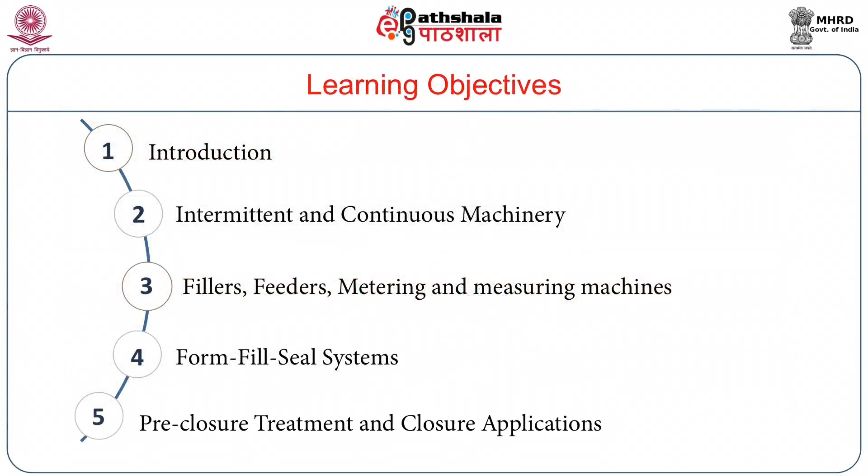Hello friends, in this module we will learn about various machineries used for packaging of food products, which includes palletizers, shrink wrapping, stretch wrapping, form fill seal machines, etc. So we will start with the introduction.

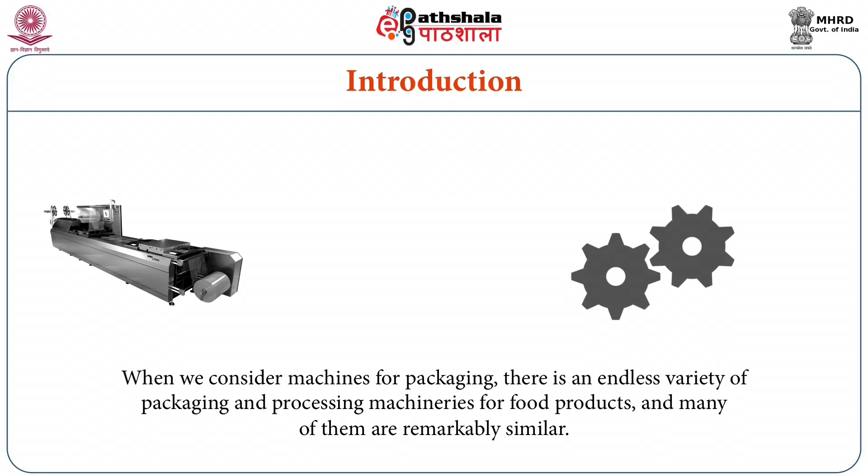Packaging is the science, art and technology of enclosing or protecting products for distribution, storage, sale and use. When we consider machines for packaging, there is an endless variety of packaging and processing machineries for food products, and many of them are remarkably similar.

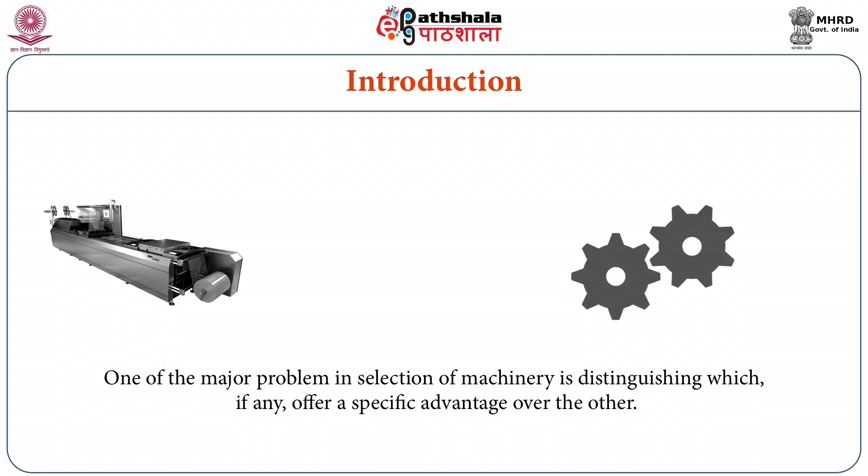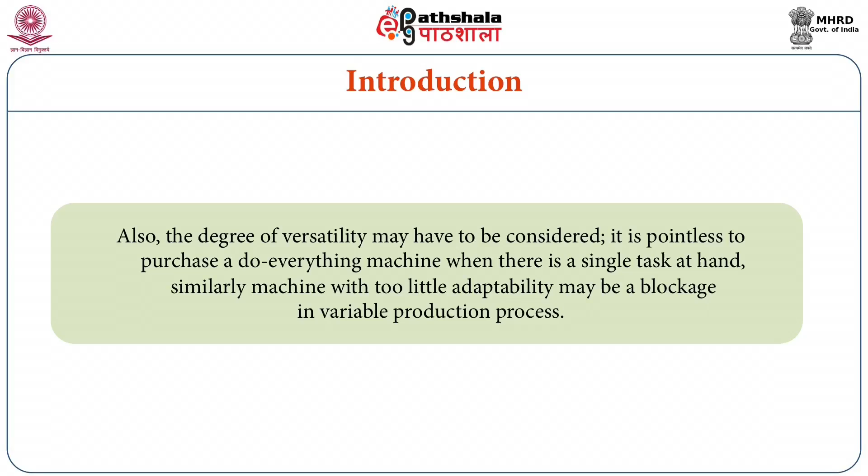One of the major problems in selection of machinery is distinguishing which, if any, offer a specific advantage over other. Also, the degree of versatility may have to be considered. It is pointless to purchase a do-everything machine when there is a single task at hand. Similarly, a machine with too little adaptability may be a blockage in variable production process.

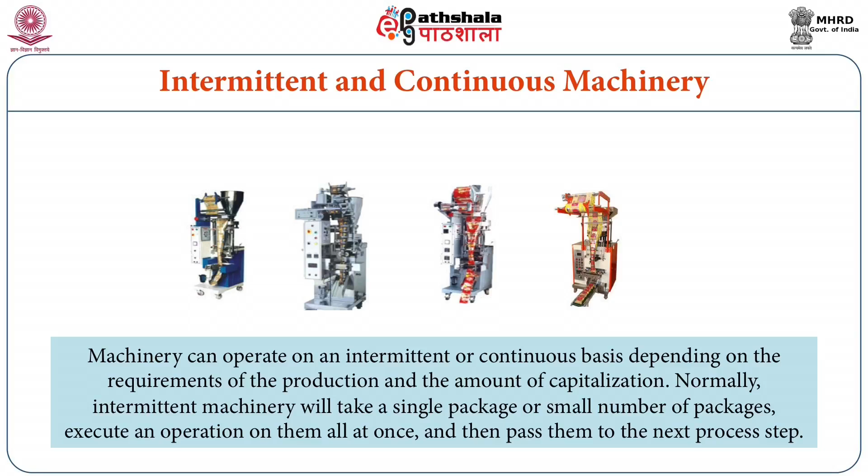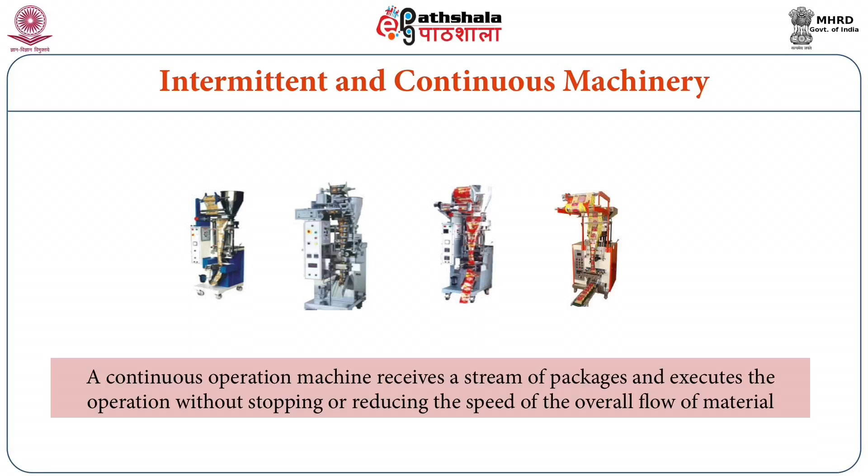Machinery can operate on an intermittent or continuous basis depending on the requirements of the production and the amount of capitalization. Normally, intermittent machinery will take a single package or small number of packages, execute an operation on them all at once and then pass them to the next process step. A continuous operation machine receives a stream of packages and executes the operation without stopping or reducing the speed of overall flow of the material.

However, a 4-station manual feed filling machine might be suitable for a small winery. That machine would be useless for a soft drink bottler who needs several thousand fillings per minute to remain competitive.

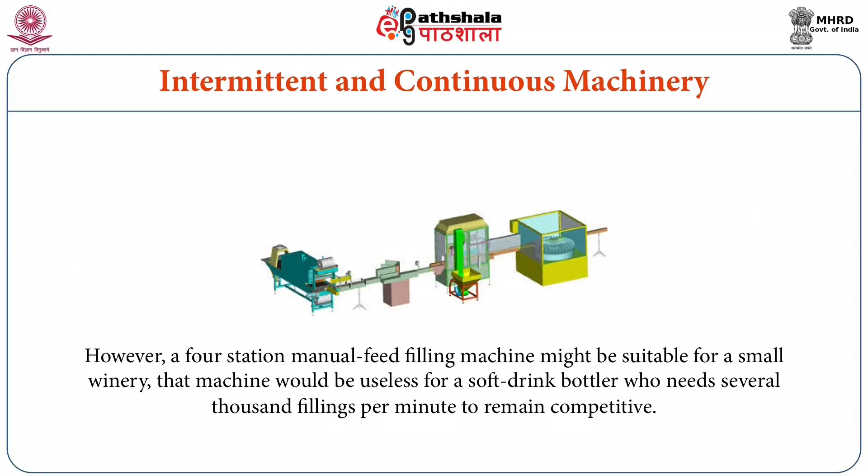Equally, while continuous machinery is more economical at high throughput rates, it might make less sense to have a high capacity operation that is in operation only for several hours a week because of low demand. Although for the smallest of markets this may happen because of employment of used machinery and lack of properly scaled equipment.

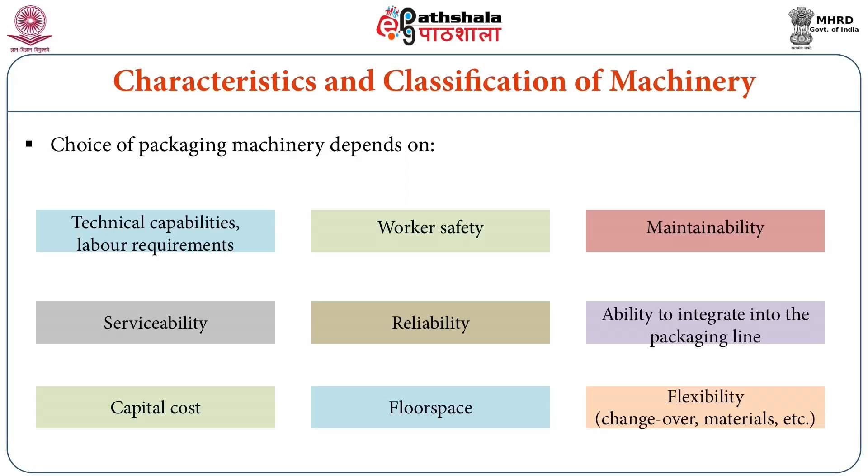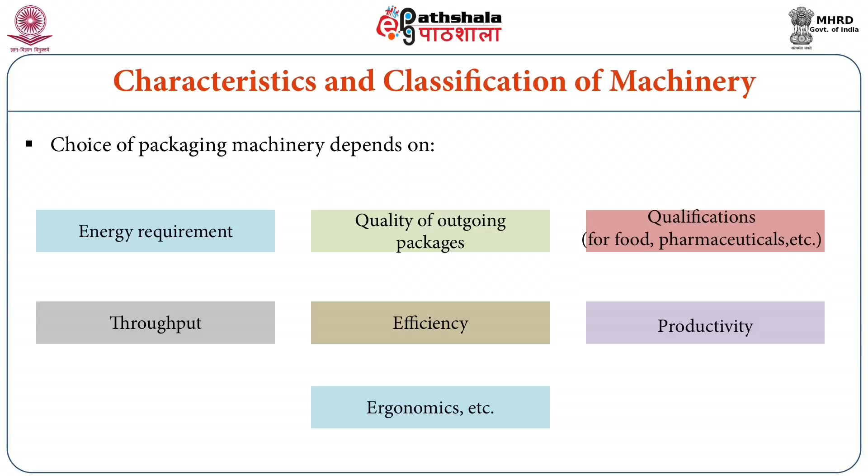The choice of packaging machinery depends on technical capabilities, labor requirements, worker safety, maintainability, serviceability, reliability, ability to integrate into packaging line, capital cost, floor space, flexibility, energy requirement, quality of outgoing packages, qualifications, for example for food, pharmaceuticals, etc., throughput, efficiency, productivity, ergonomics, etc.

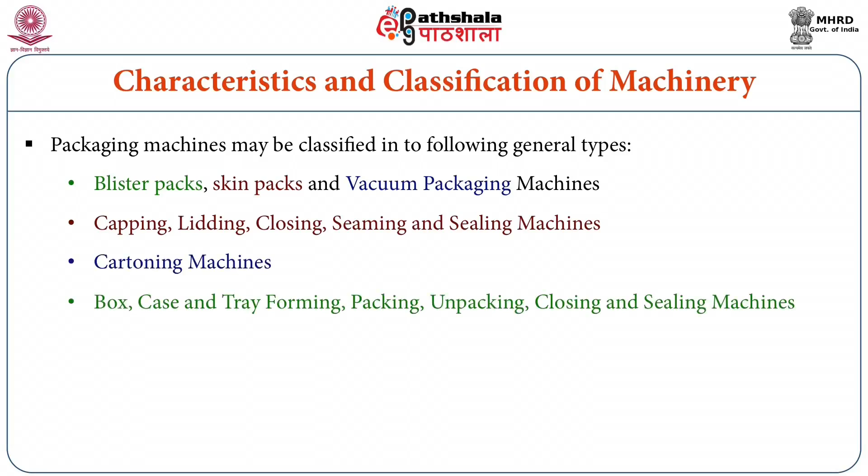The packaging machines may be classified into some general types, which includes blister packs, skin packs and vacuum packaging machines, bottle capping equipment, overcapping, lidding, closing, seaming and sealing machines, cartoning machines, box, case and tray forming, packing, unpacking, closing, sealing machines, cleaning, sterilizing, cooling and drying machines, conveyors, accumulating and related machines, feeding, orienting, placing and related machines, filling machines.

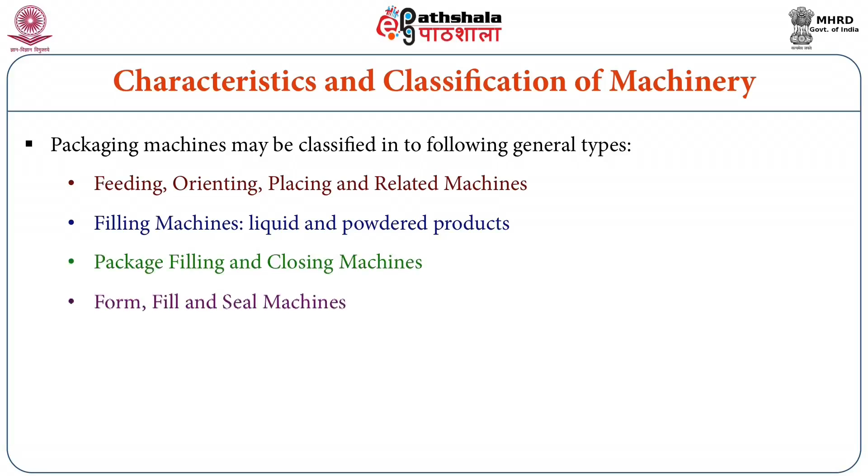Handling liquid and powder product, package filling and closing machines, form fill and seal machines, inspecting, detecting and check weighing machines, palletizing, depalletizing, unit load assembly, product identification, labeling, marking, etc., wrapping machines, converting machines, and other specialty machinery include slitters, perforating machines, etc.

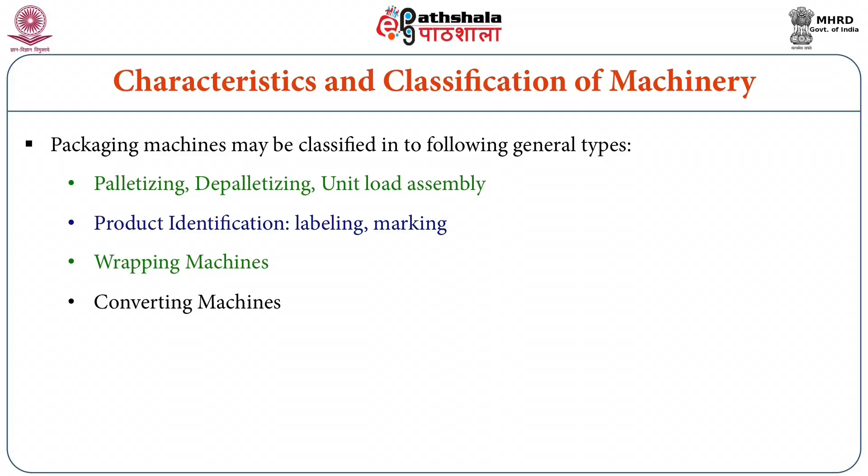So in this, the first type is fillers, feeders, metering, and measuring machines. The job of fillers and feeders is to take product in a determined number or amount to fill the assembled package. There is a wide spectrum of different types of equipment for this purpose, many of which can handle difficult materials such as thick pastes or creams or very fine objects.

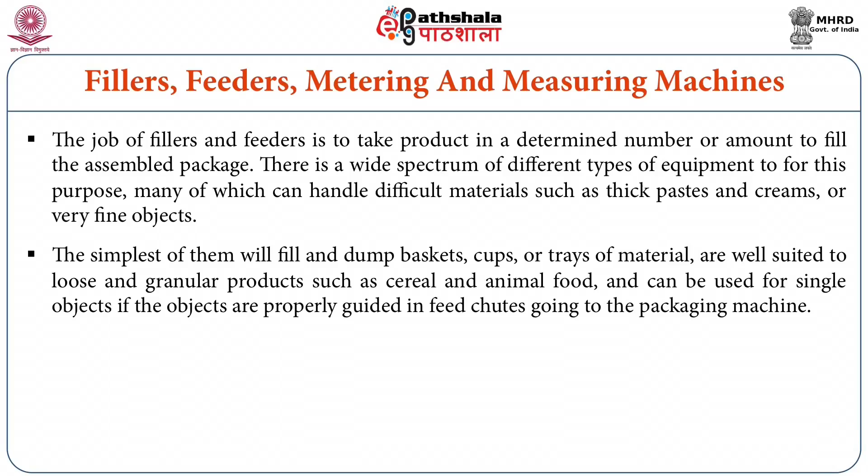The simplest of them will fill and dump baskets, cups or trays of material, are well suited to loose and granular products such as cereal and animal food, and can be used for single objects if the objects are properly guided in feed chutes going to the packaging machine.

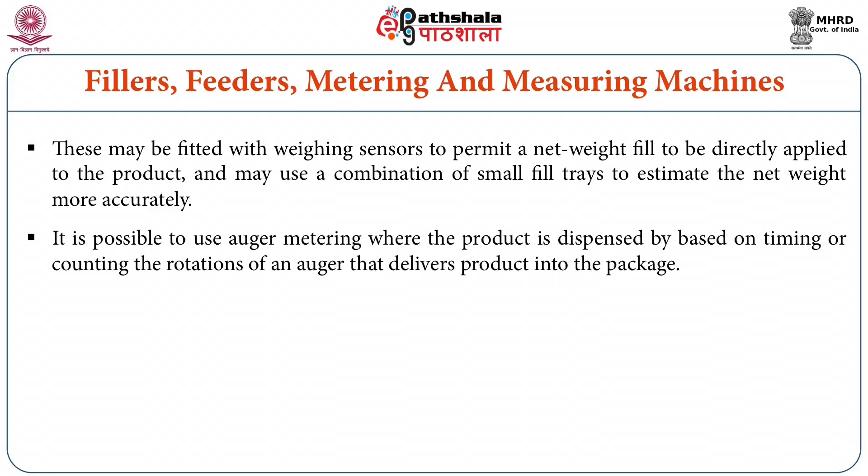This may be fitted with weighing sensors to permit a net weight fill to be directly applied to the product, and may use a combination of small fill trays to estimate the net weight more accurately. It is possible to use auger metering where the product is dispensed based on timing or counting the rotations of an auger that delivers the product into the package.

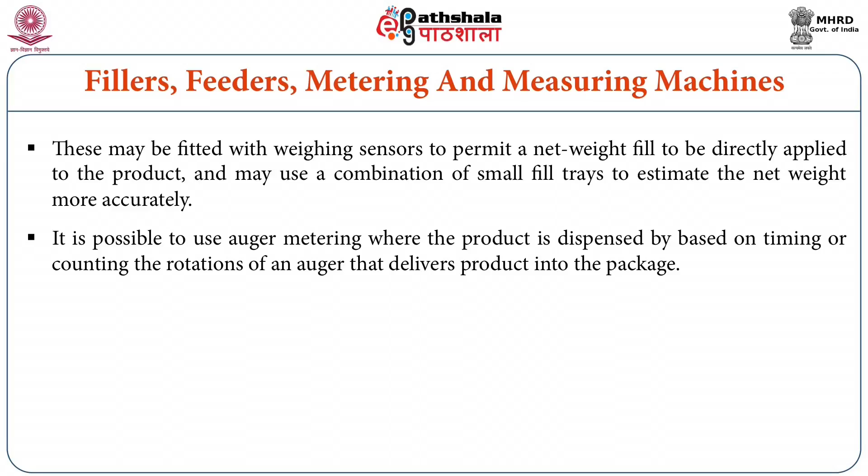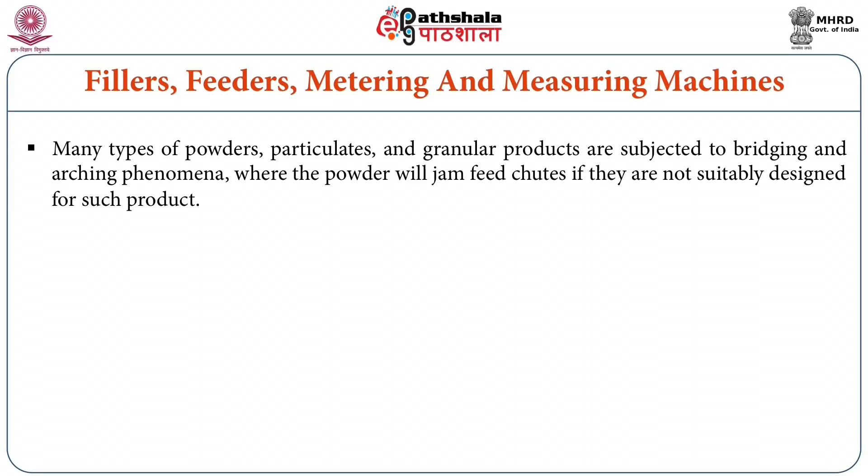Many types of powder, particulates and granular products are subjected to bridging and arching phenomena, where the powder will jam feed chutes if they are not suitably designed for such product. Fine powders create cohesive arches using interparticulate bonding, where larger particles will make interlocking arches, where the mechanical locking of irregularly shaped particles provides the cohesiveness to form arches.

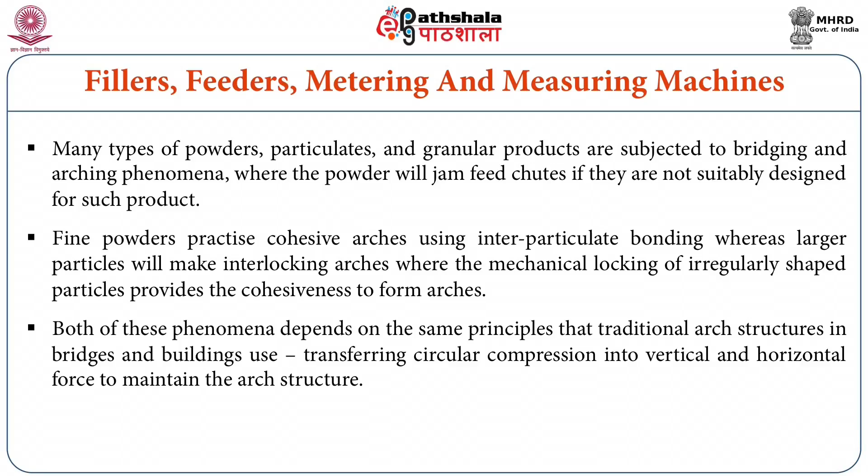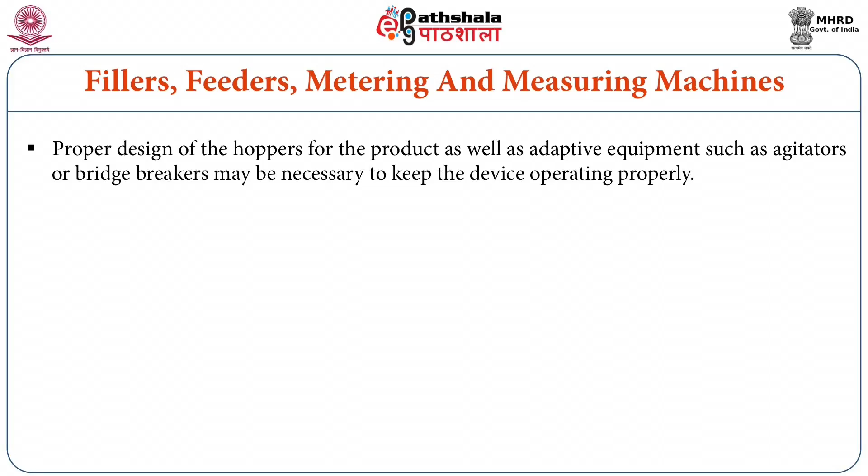Both of these phenomena depend on the same principle that traditional arch structures in bridges and buildings use, transferring circular compression into vertical and horizontal force to maintain the arch structure. Proper design of hoppers for the product, as well as adaptive equipment such as agitators or bridge breakers, may be necessary to keep the device operating properly.

On the contrary, bridging phenomena can be used to stop product from flowing in certain types of measuring devices such as screw auger fillers.

They are designed with a small disc at the end of the auger that creates blockages when the auger is not rotating, and depends on bridging to stop the flow between package fillings.

Direct counting machines can use trays, simple photocells, or complex vision systems and pick-and-place manipulators to acquire the exact number of products required in a package. Similarly, it is possible to use the package or an inner tray as a measuring device, filling it with the appropriate number of product units and then enclosing it in a larger secondary package.

Filling by gravitation. Filling by gravity is used for filling thin liquids like milk into glass or plastic bottles. In gravitational filling, the filling process is stopped when the pre-calibrated filling height has been reached. This system is suitable for filling milk in glass bottles, however, packaging milk in bottles is outdated now in India.

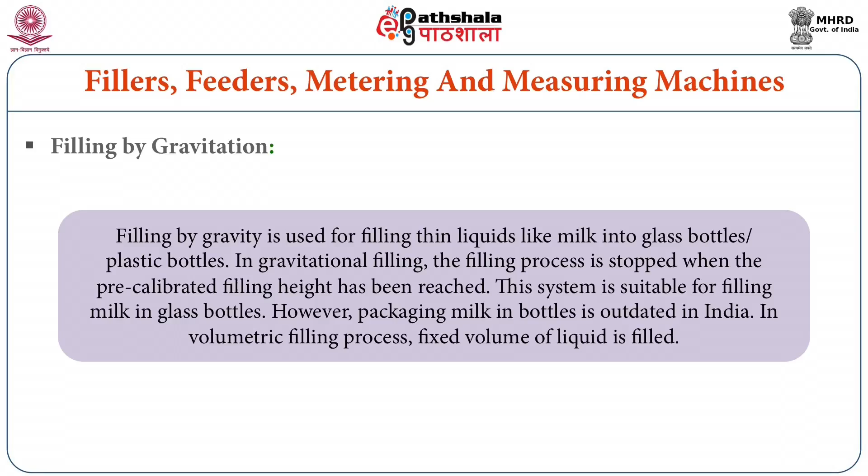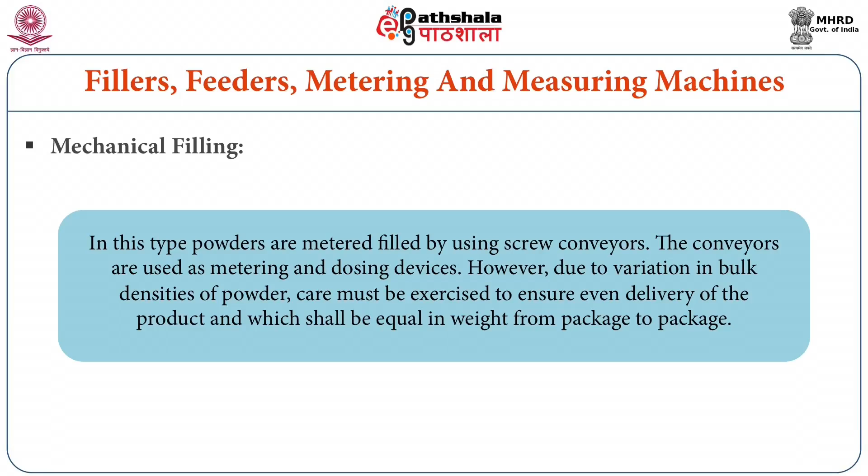In volumetric filling, a fixed volume of liquid is filled. Another type is mechanical filling, where powders are metered and filled using screw conveyors. The conveyors are used as metering and dosing devices. However, due to variation in the bulk densities of powder, care must be exercised to ensure even delivery of the product, which shall be equal in weight from package to package.

Cup filling machines. Plastic cups, either preformed from a film in the machine itself or ready-made cups when used, are placed in a stacker of the machine.

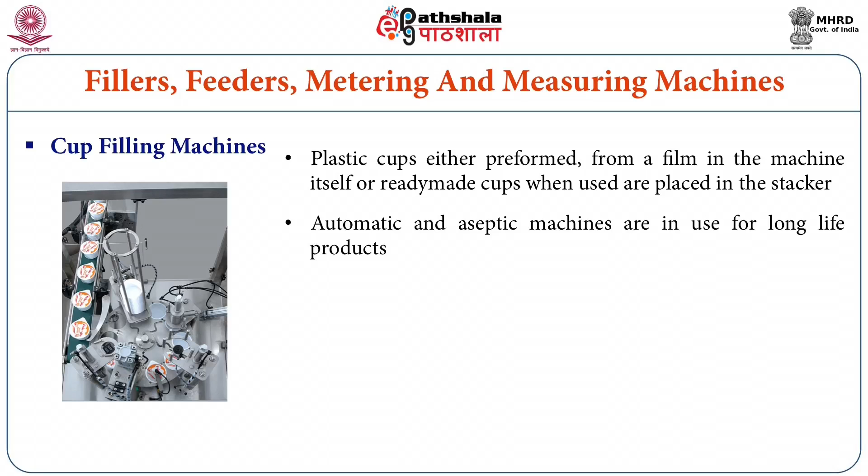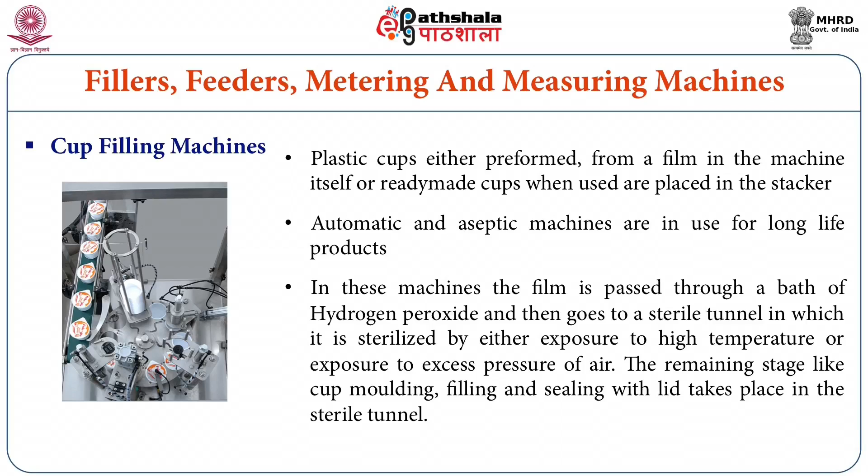Automatic packing machines which work aseptically are used for production of long-life products. In these machines, the film is passed through a bath of hydrogen peroxide and then goes to a sterile tunnel in which it is sterilized by either exposure to high temperature or exposure to excess pressure of air. The remaining stages, like cup molding, filling, and sealing with lid, take place in the sterile tunnel.

Form fill seal systems. These are the widely used systems and are the preferred method for many food items. As the name suggests, it forms packages from a roll around a central mandrel that incorporates a product fill tube and allows the forming, filling, and sealing of packages of almost all types of products, from solids to liquids like milk, juices, etc. Mostly these may be multiple head machines to produce small packets of sauce for fast food restaurant use.

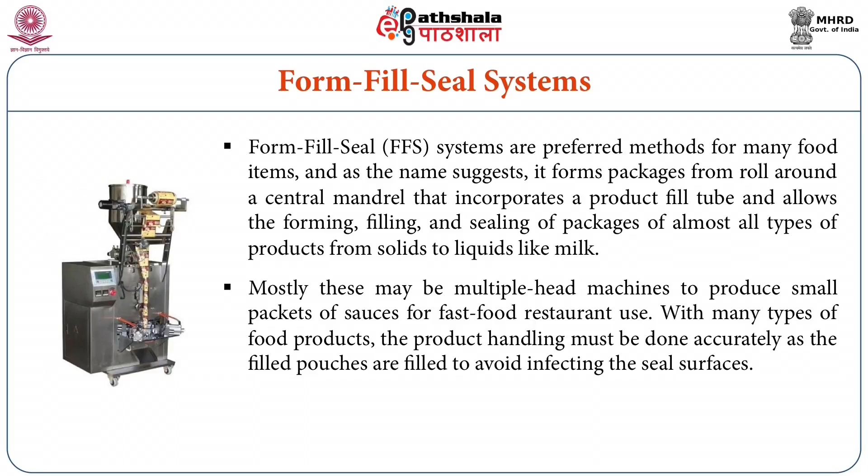With many types of food products, the product handling must be done accurately, as the filled pouches must avoid infecting the seal surfaces. Additional types of machinery peculiar to the food industry will insert slices of meat products into folded or vacuum-formed film and seal it, or even extrude a cylinder of cheese food into a tube of plastic film.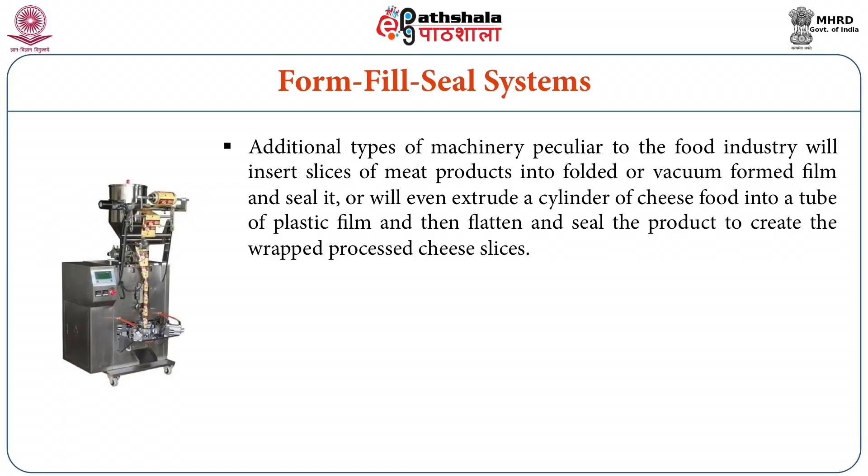Then flatten and seal the product to create the wrapped processed cheese slices. Specialty machinery may be necessary for particularly sensitive materials such as fruit juices and meats that may discolor with the slightest gain of dissolved metal. In the most extreme cases, like processing of juices and pharmaceutical or cosmetic products, special surfaces must be constructed for contact with the product using materials such as borosilicate glass, Teflon, or other materials as appropriate.

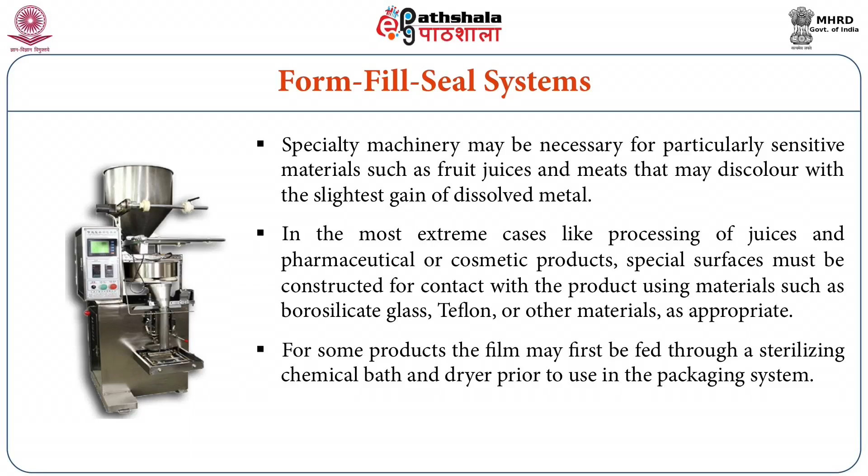For some products, the film may first be fed through a sterilizing chemical bath and dryer prior to use in the packaging systems, for example in case of aseptic packing systems. The film approaches the back of a long hollow conical tube, and when the center of the plastic is near the tube, the outer edges of the film form flaps that wrap around the conical tube.

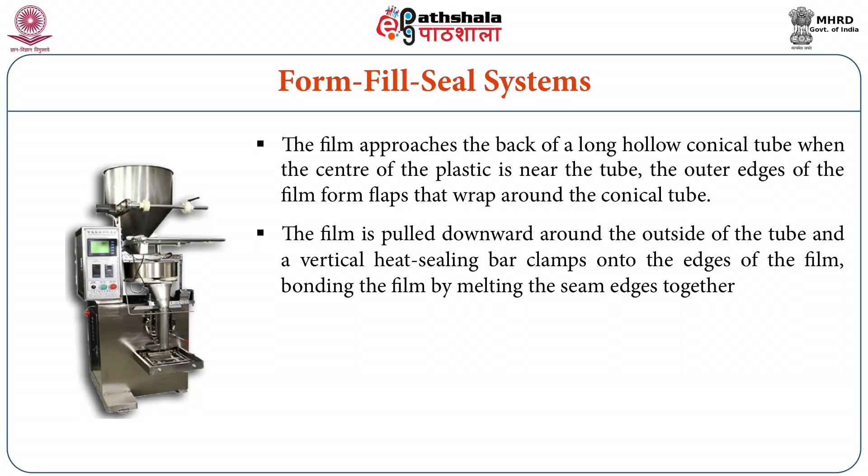The film is pulled downward around the outside of the tube, and the vertical heat sealing bar clamps onto the edges of the film, bonding the film by melting the seam edges together. To start the bagging process, a horizontal sealing bar clamps across the bottom edge of the tube, bonding the film together and cutting off any film below.

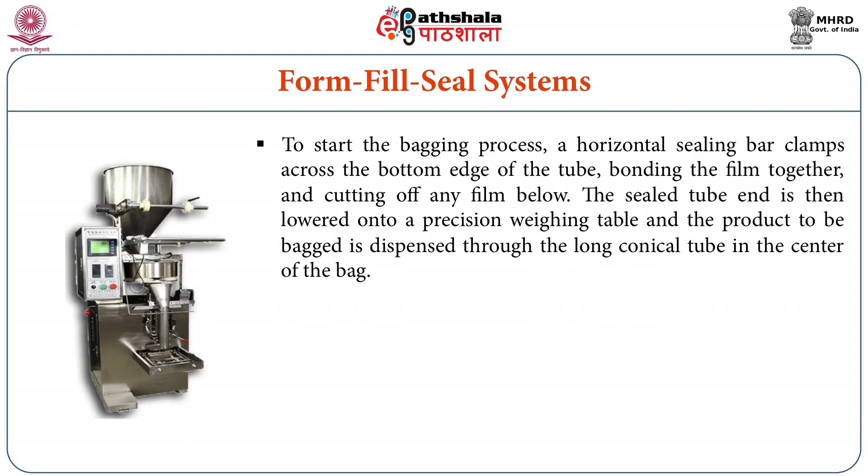The sealed tube end is then lowered onto a precision weighing table, and the product to be bagged is dispensed through a long conical tube in the center of the bag. When the tare weight of the product-filled bag is reached, filling stops, and the horizontal sealing bar seals the top of the bag and simultaneously forms the bottom of the next bag above. This bag is then cut off from the tube, and the now-sealed package is ready to advance onward into the product boxing and shipping processes.

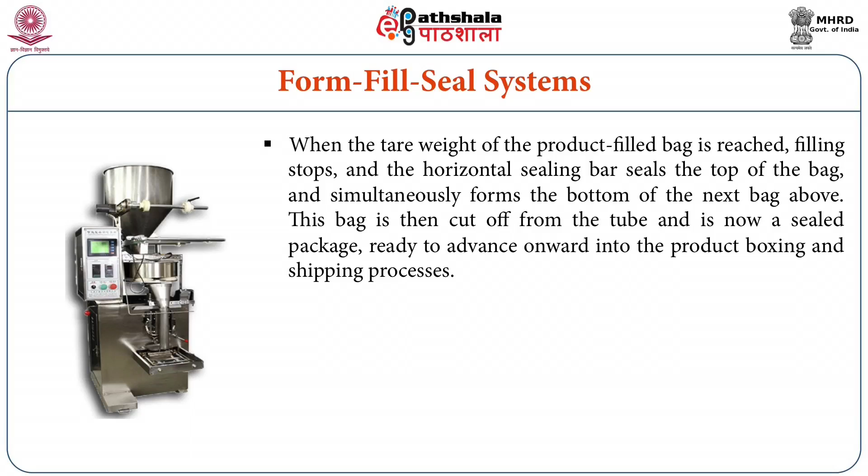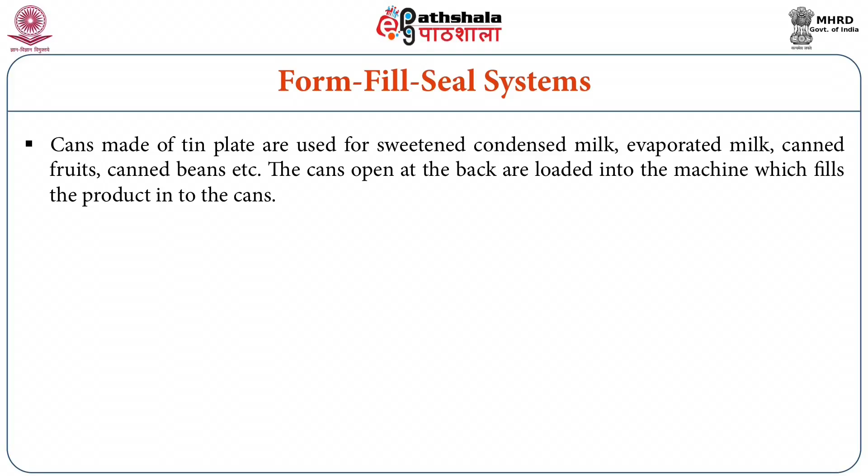Now we will see the packaging in cans and tubes. Cans made of tin plate are used for sweetened condensed milk, evaporated milk, canned fruits, canned beans, etc. The cans, open at the back, are loaded into the machine which fills the product into the cans. Then the lids are applied and closed by either simple or double seaming, depending on the product.

Aerosol cans are used for the packing of whipped cream. In this, the product is filled with a propellant which is under pressure.

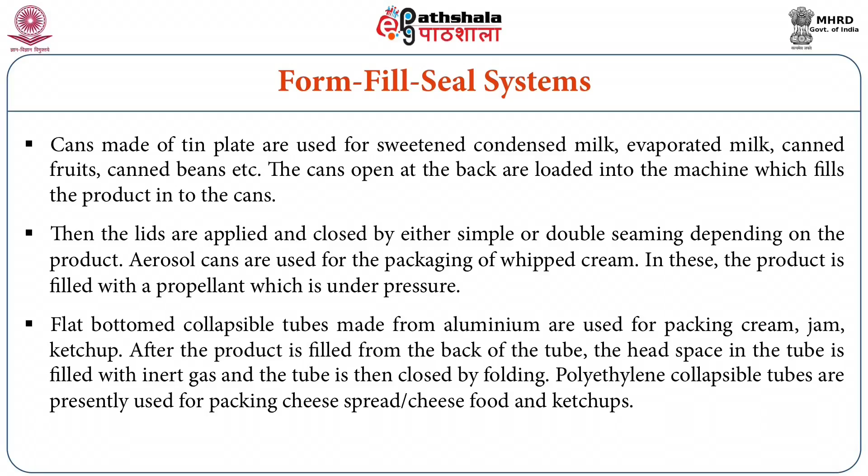Flat bottom collapsible tubes made from aluminum are used for packing cream, jam, ketchup, etc. After the product is filled from the back of the tube, the headspace is filled with inert gas and the tube is then closed by folding. Polyethylene collapsible tubes are presently used for packing cheese, spread, cheese food and ketchups.

Next is shrink wrapping machines. Shrink wrapping includes packing of one or several articles with a thermoplastic film which, when subjected to heat, shrinks and forms a tight wrap around the object.

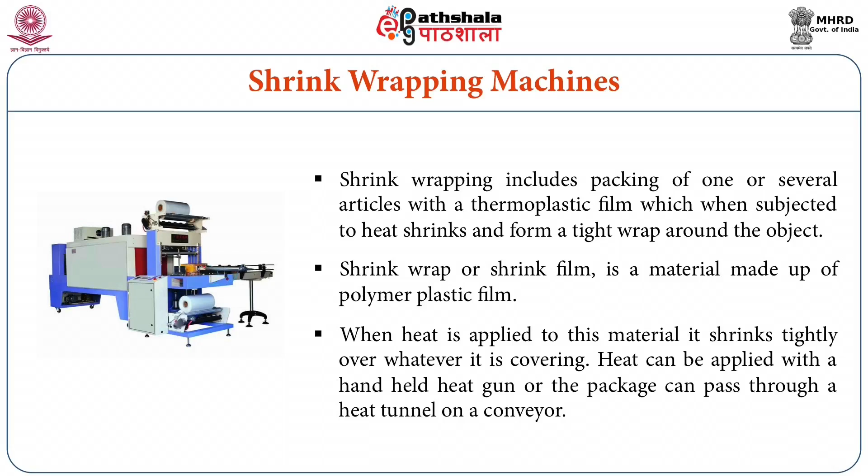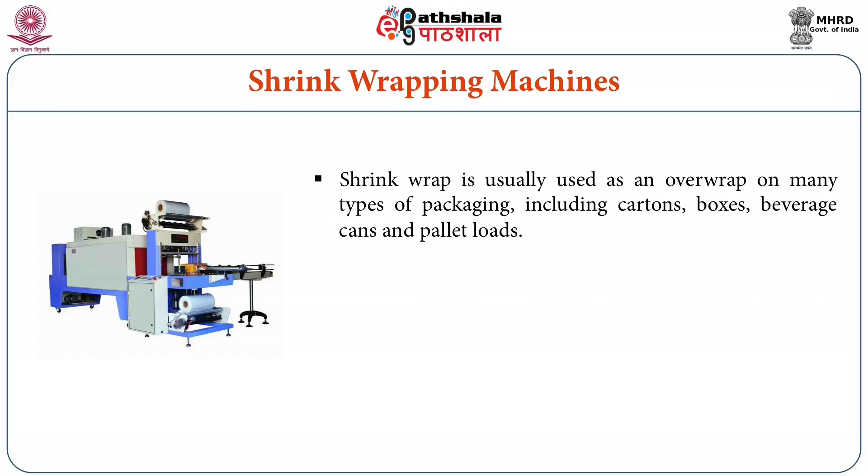Shrink wrap or shrink film is a material made up of polymer plastic film. When heat is applied, it shrinks tightly over whatever it is covering. Heat can be applied with a handheld heat gun or the package can pass through a heat tunnel on a conveyor. Shrink wrap is usually used as an overwrap on many types of packaging including cartons, boxes, beverage cans and pallet loads. A variety of products may be enclosed in shrink wrap to stabilize them, unitize them, keep them clean and add a degree of tamper resistance.

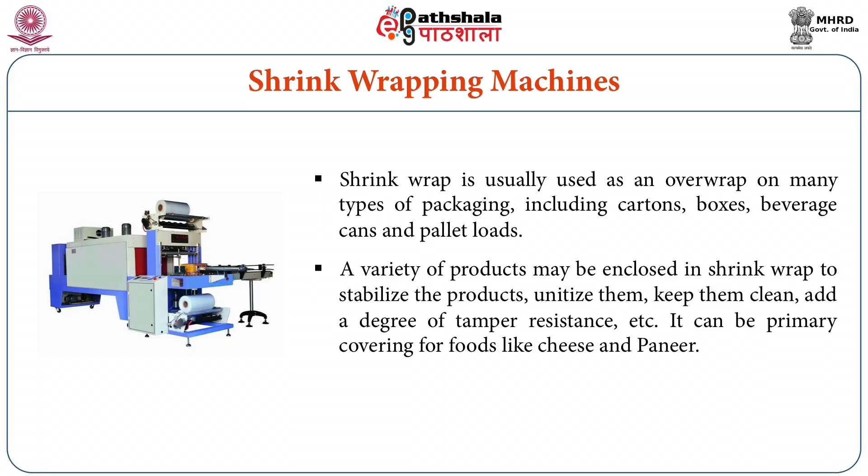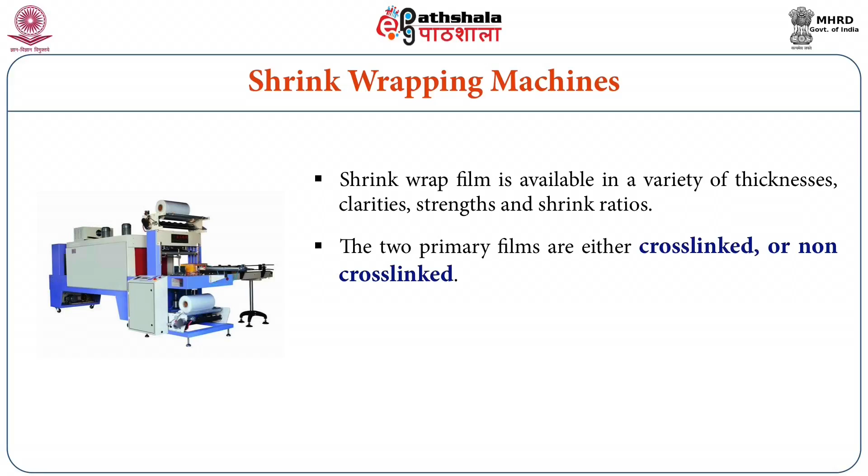It can be a primary covering for foods like cheese and paneer. Shrink wrap film is available in a variety of thicknesses, clarities, strengths and shrink ratios. The two primary films are either cross-linked or non-cross-linked. Major shrink films include PVC and several other compositions like LDPE, LLDPE, PP, EVA, etc. Co-extrusions and laminations are available for specific mechanical and barrier properties for shrink wrapping foods.

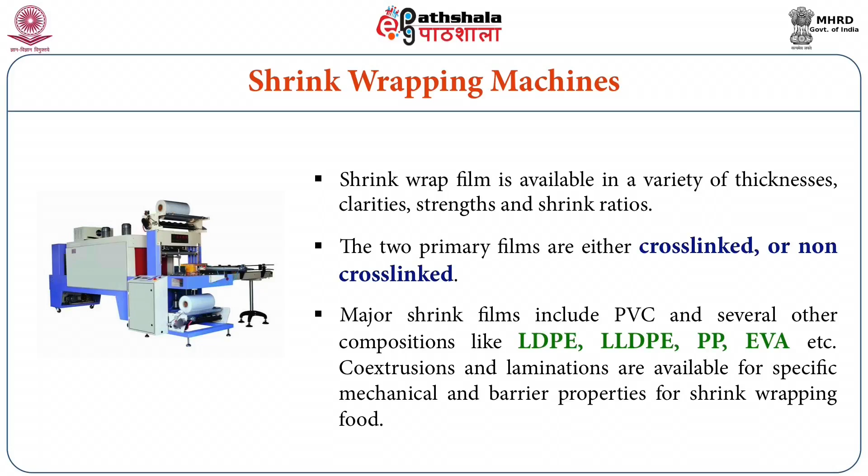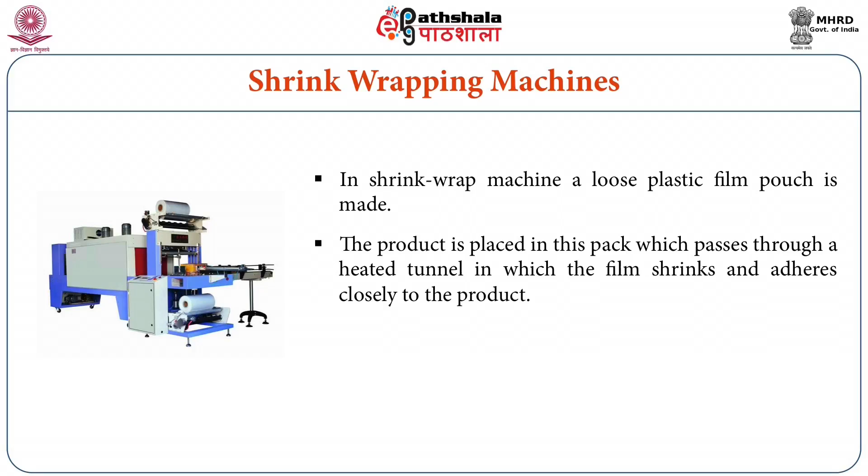In a shrink wrap machine, a loose plastic film pouch is made. The product is placed in this pack which passes through a heated tunnel in which the film shrinks and adheres closely to the product. The film is commonly heated by hot air, infrared rays, or hot water. Shrink wrapping is also used to hold together several singly wrapped products or small packages in a multiple unit package.

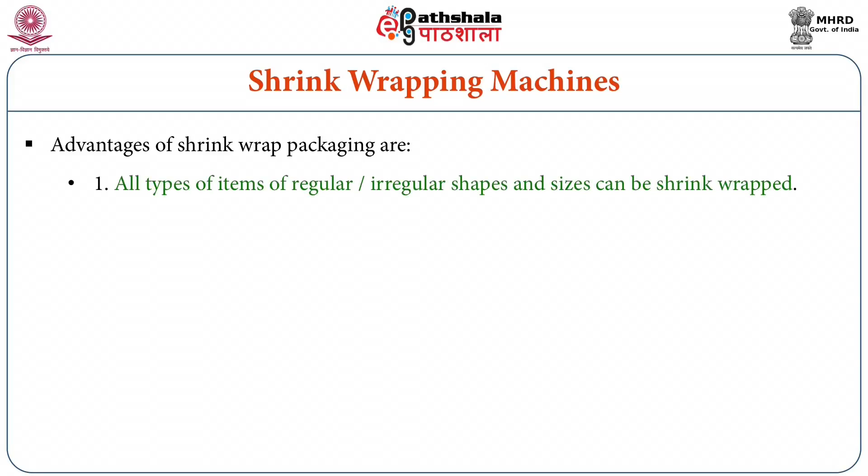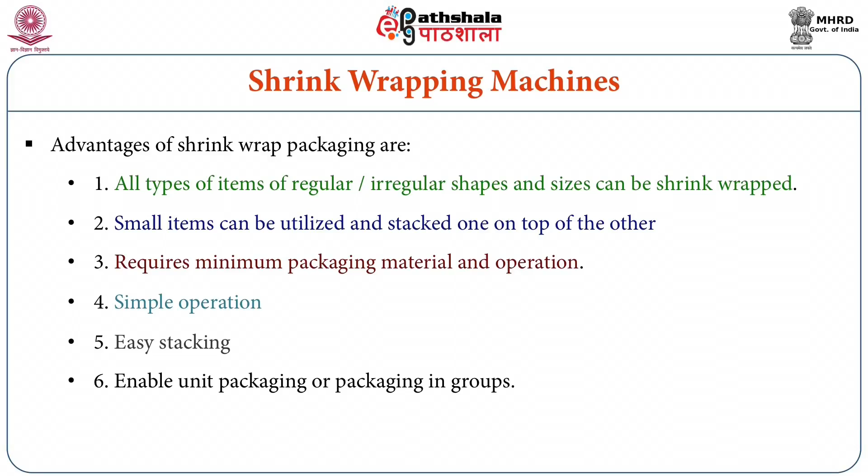Advantages of shrink wrap packaging include: all types of items of regular or irregular shapes and sizes can be shrink wrapped. Small items can be utilized and stacked on top of each other. It requires minimum packaging and operation, simple operation, easy stacking, and it enables unit packaging or packaging in groups.

Robotic machines. Robotic operations are most effective in operations that are repetitive and predictable but require either control of heavy goods, as is the case with palletizers, or fast, accurate pick and place operations that need consistent, accurate results at a speed that human operators would have difficulty maintaining.

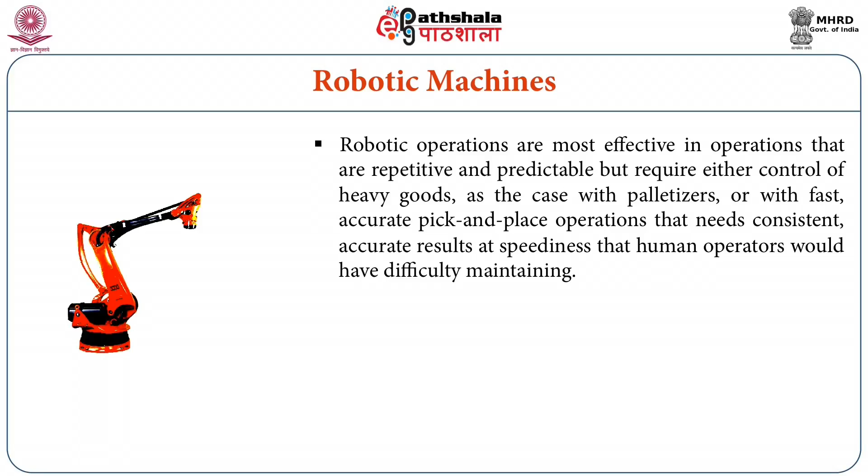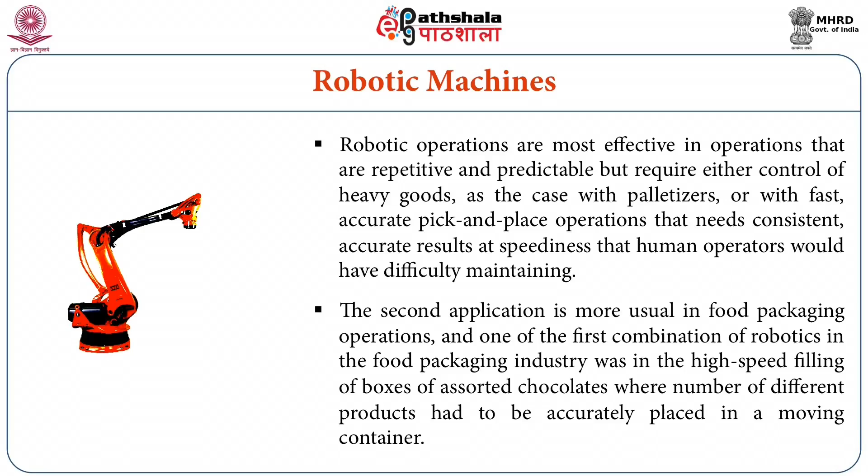The second application is more usual in food packaging operations, and one of the first combinations of robotics in the food packaging industry was in the high speed filling of boxes of assorted chocolates, where a number of different products had to be accurately placed in a moving container.

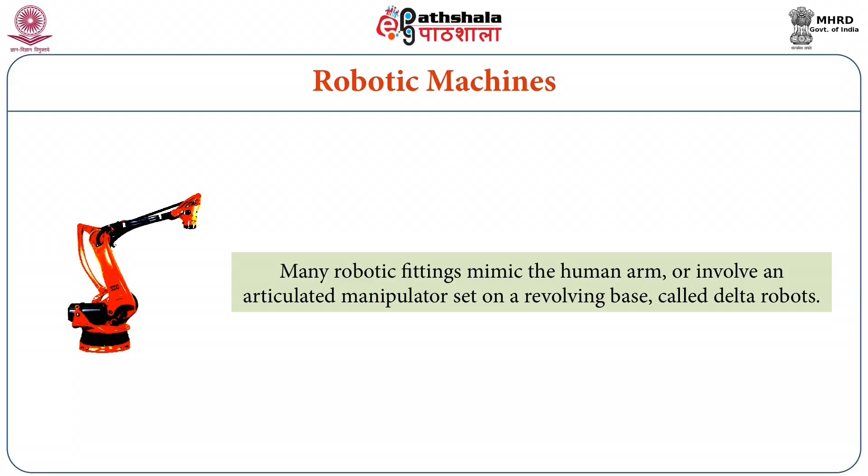Many robotic fittings mimic the human arm or involve an articulated manipulator set on a revolving base called delta robots. They have been successfully incorporated into many packaging operations. Originally developed by Raymond Clavel at Ecole Polytechnique Federale de Lausanne, these can be made with high speed actuators and lightweight carbon fiber elements to provide extremely accurate high speed operation for the management of small light objects.

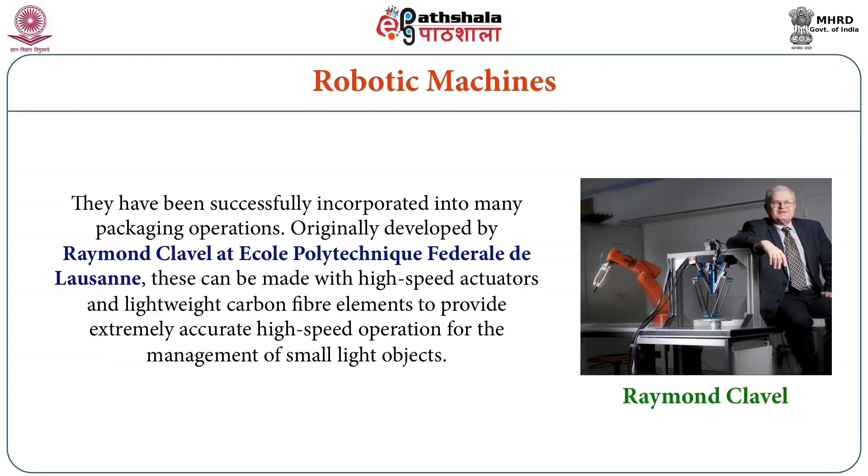They have been implemented in many applications ranging from machine parts to bakeries and confectionery manufacturing.

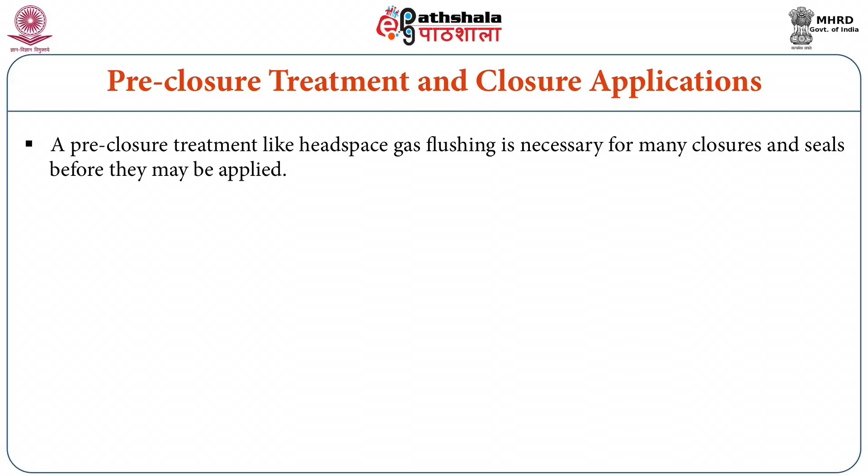Pre-closure treatments like headspace gas flushing are necessary for many closures and seals before they may be applied. This may require a remarkably complex system of nozzles and diffusers to avoid blowing the product out of the package or contaminating the seal.

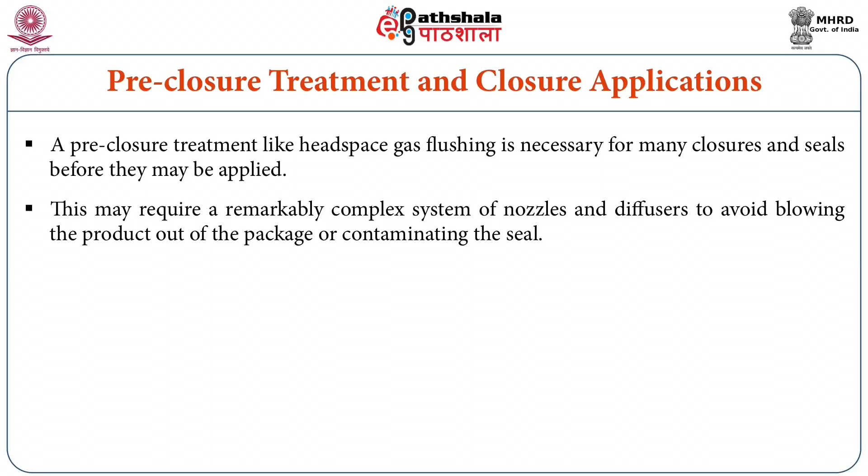Vacuum may be applied either alone or as part of a gas-flush process, as in a draw-redraw flushing, where first air is withdrawn, then replaced with gas, and the process is repeated to ensure saturation of the flush gas. This procedure is common in products with high interstitial volume such as bagged salads.

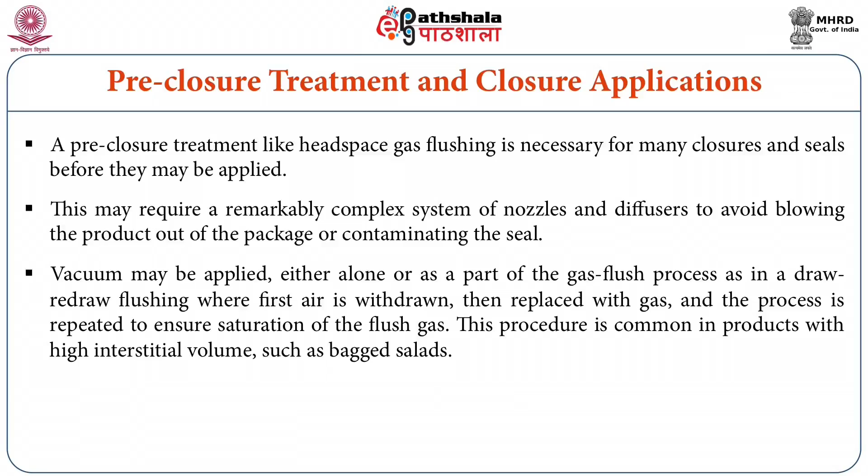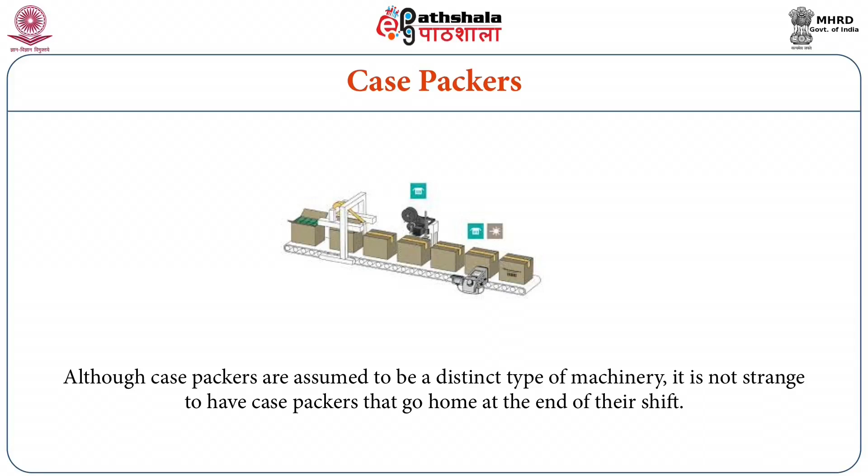Case packers. Although case packers are assumed to be a distinct type of machinery, it is not strange to have case packers that go home at the end of their shift. Several operations still depend on manual labor for some level of case aggregation, filling and packing.

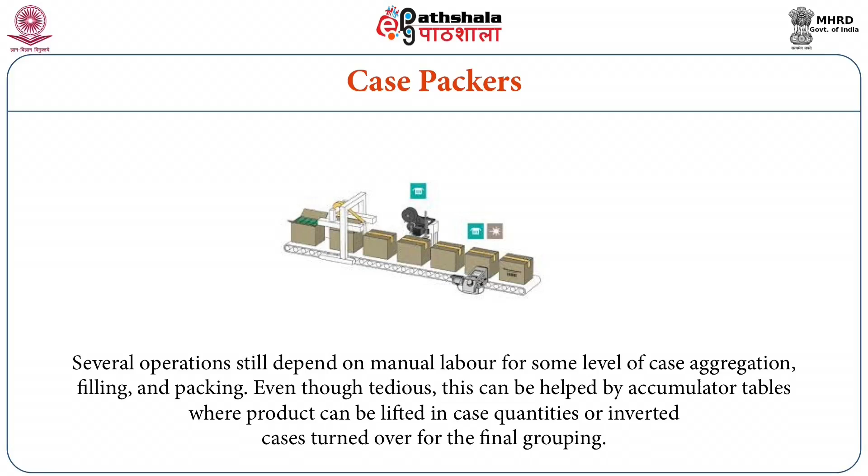Even though tedious, this can be helped by accumulator tables where product can be lifted in case quantities, or inverted cases turned over for final grouping. Bigger operations may automate many of these tasks with machines lifting case quantities into shipping containers and sealing them.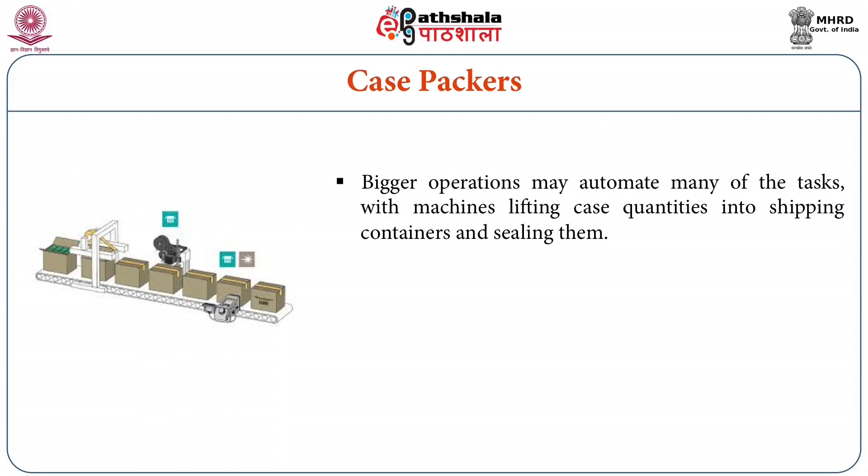At this point, particularly for small consumer items and food, the handling of the filled case requires some attention to the ergonomics of material movement, because the filled case may be heavy enough to cause health or safety problems for the personnel involved.

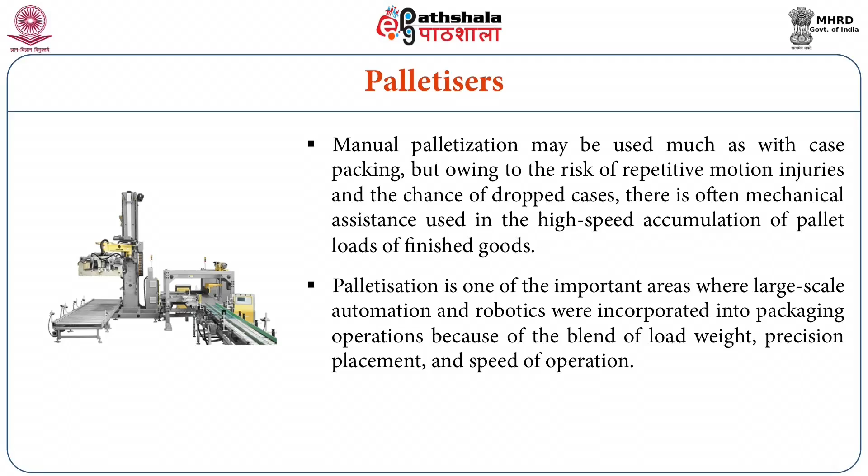Palletizers. Manual palletization may be used much as with case packing, but owing to the risk of repetitive motion injuries and the chance of dropped cases, there is often mechanical assistance used in the high speed accumulation of pallet loads of finished goods. Palletization is one of the important areas where large scale automation and robotics were incorporated into packaging operations because of the blend of load weight, precision placement and speed of operation.

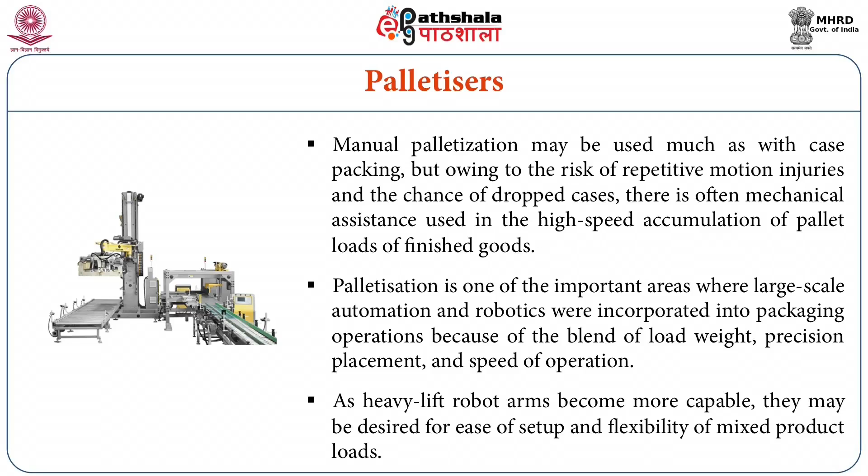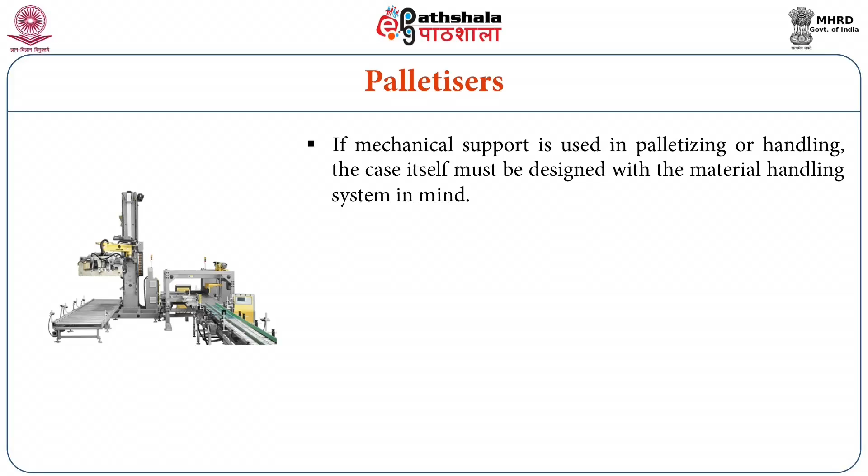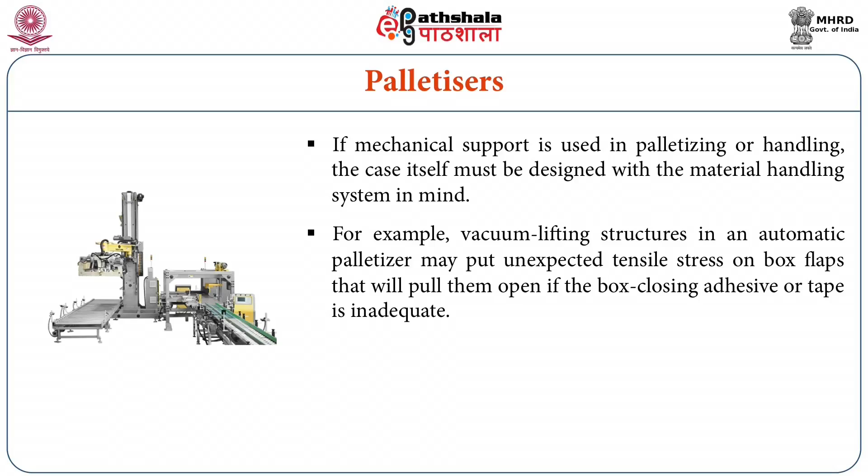As heavy lift robot arms become more capable, they may be desired for ease of setup and flexibility of mixed product loads. If mechanical support is used in palletizing or handling, the case itself must be designed with a material handling system in mind. For example, vacuum lifting structures in an automatic palletizer may put unexpected tensile stress on box flaps that will pull them open if the box closing adhesive or tape is inadequate.

Stretch wrapping. Stretch wrap or stretch film is a highly stretchable plastic film that is wrapped around items. The elastic recovery keeps the item tightly bound. In contrast, shrink wrap is applied loosely around the item and shrinks tightly with heat. It is frequently used to unitize pallet loads but also may be used for bundling smaller items.

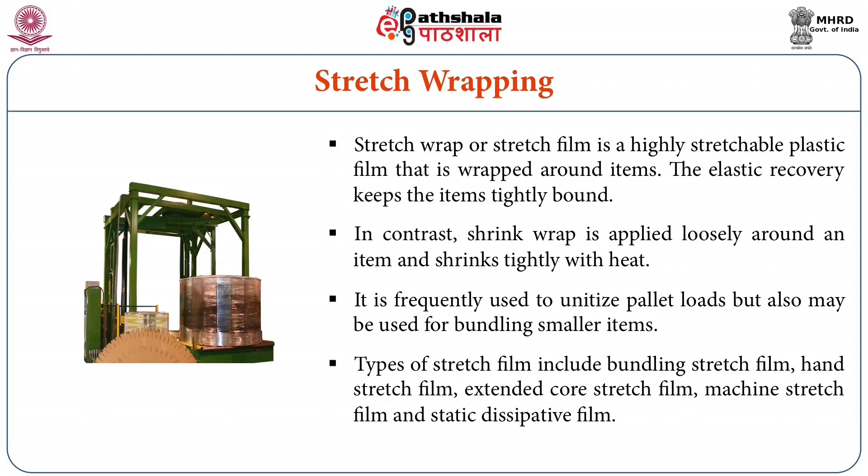Types of stretch film include bundling stretch film, hand stretch film, extended core stretch film, machine stretch film, and static dissipative film. The most common stretch wrap material is LLDPE, which is produced by copolymerization of ethylene with alpha olefins, the most common of which are butene, hexene, and octene. Other types of polyethylene and PVC can also be used.

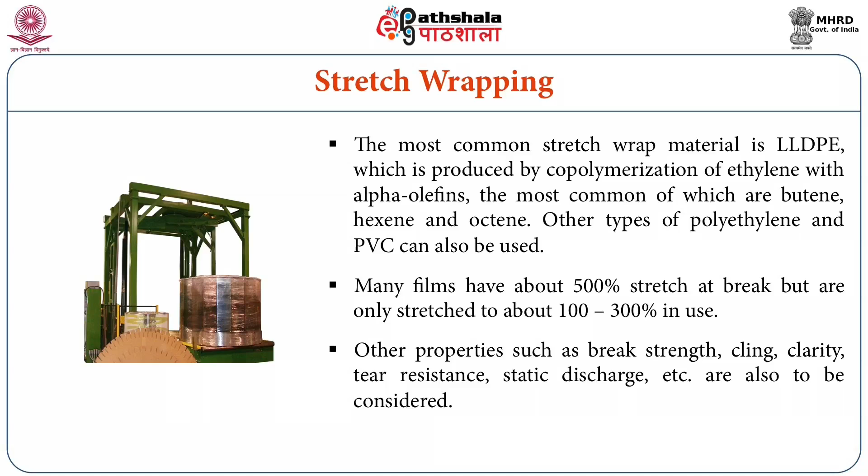Many films have about 500% stretch at break but are only stretched to about 100 to 300% in use. Other properties such as break strength, cling, clarity, tear resistance, static discharge, etc. are also to be considered.

In pallet unitizing, stretch wrap can have several functions like improved stability of products or packages, forming a unit load, more efficient handling and storage of unit loads, some degree of dust and moisture protection, some degree of tamper resistance and resistance to package pilferage.

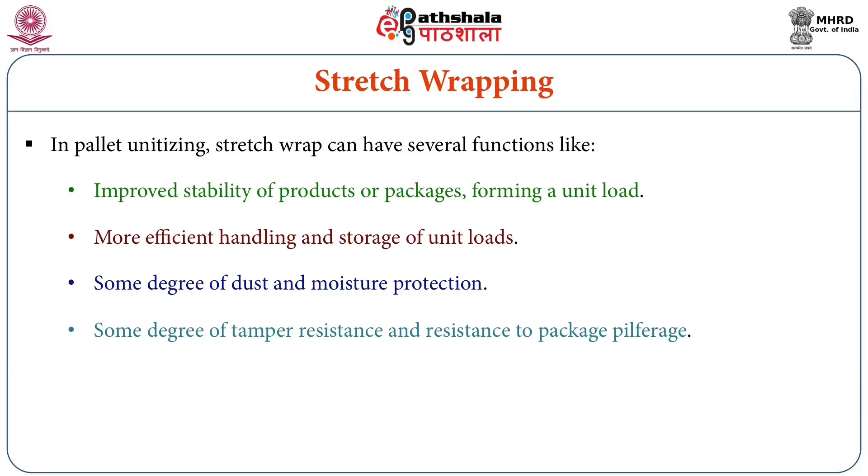Stretch wrapping is the most cost effective way to keep loads secure on a pallet. Stretch wrapping can be applied manually with small rolls of film. Dispensers are also available for larger rolls. Machinery is available to automate the operation.

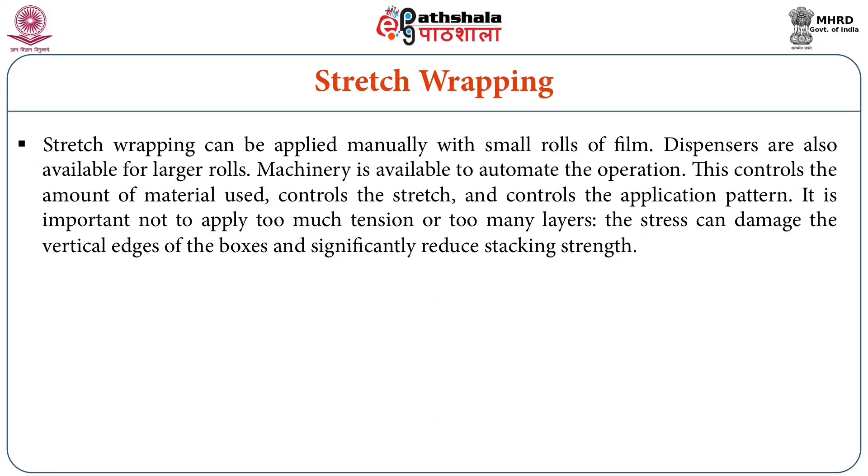This controls the amount of material used, controls the stretch and controls the application pattern. It is important not to apply too much tension or too many layers. The stress can damage the vertical edges of the boxes and significantly reduce the stacking strength.

In inert gas packing, initially whatever air is there is removed and then the inert gas is flushed inside so that minimum oxygen remains. For example, in case of fruit products or sometimes in some other products also, initially a small pinhole is kept in a can from which almost all air is removed and then nitrogen gas is flushed inside.

In case of vacuum packaging, whatever air is there is removed and then the product or the package comes into direct contact with the product and it shrinks. So this is normally used for cheese, paneer, etc.

The assembly sequence of the particular product and package will decide the type and position of the machines and personnel tasks. There are many types and combinations of packaging machinery available. Some are designed as per the need of the manufacturer, but generalized machines cannot be used for packaging of all the products, as stringent requirements exist for many types of common products.

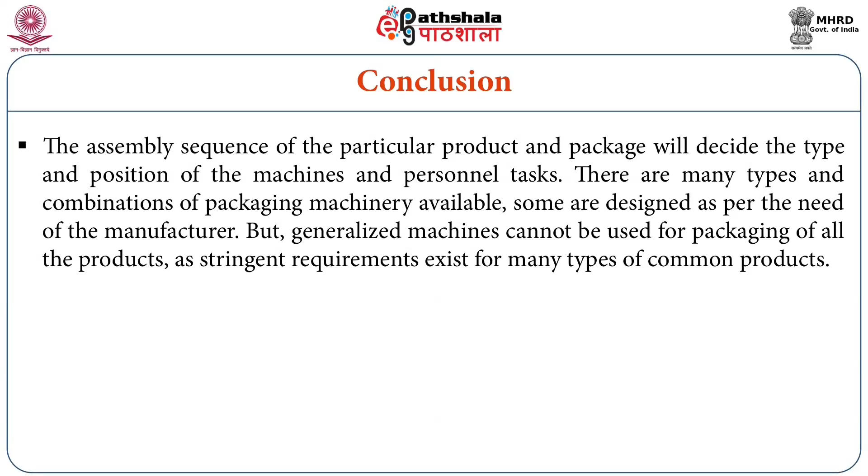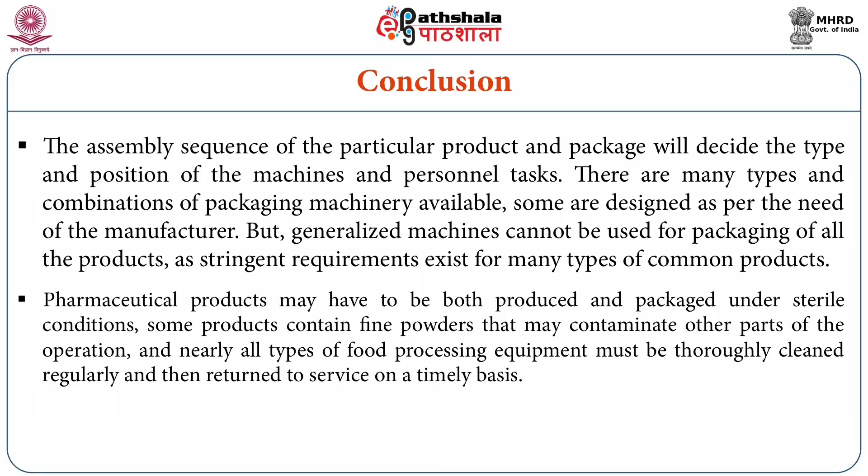Pharmaceutical products may have to be both produced and packaged under sterile conditions. Some products contain fine powders that may contaminate other parts of the operation, and nearly all types of food processing equipment must be thoroughly cleaned regularly and then returned to service on a timely basis. Some of these machines must have glass lined product contact surfaces or entire machines that are made of stainless steel to avoid corrosion or reaction with the product or cleaning solutions.

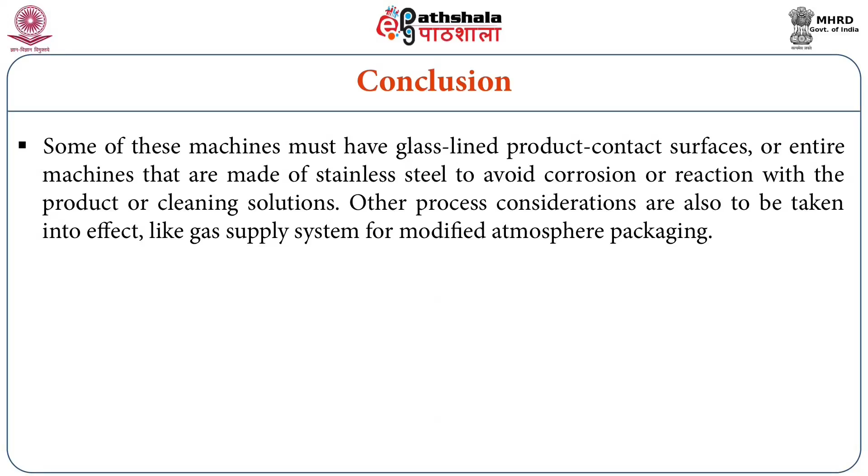Other process considerations are also to be taken into effect, like gas supply system for modified atmosphere packaging. So friends, concluding this module, we can say that we have seen different machineries used for packing of different food products. But to decide a machinery for a specific food product, we need to consider many things, that is the economy, its multiple usage or versatility, etc.

This has to be considered, and depending on type of product, or if you have a number of products, then the machine used should be designed accordingly and selected accordingly.